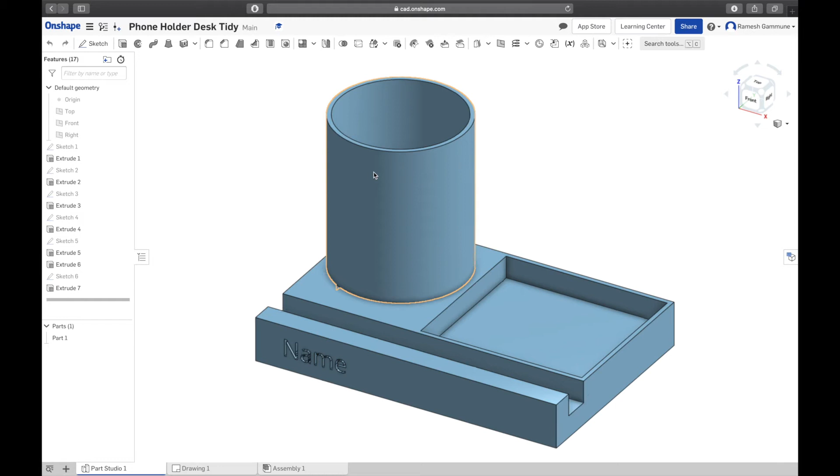I figured out that the best way for us to get to know the software is to actually make some little desk tidy. So your pencils and pens can go in there, your other bits and bobs can go in here, and down here is a little area for your phone to sit on, in landscape or portrait format, so you can watch videos while studying or whatever. It's small enough, and it's got your name here too.

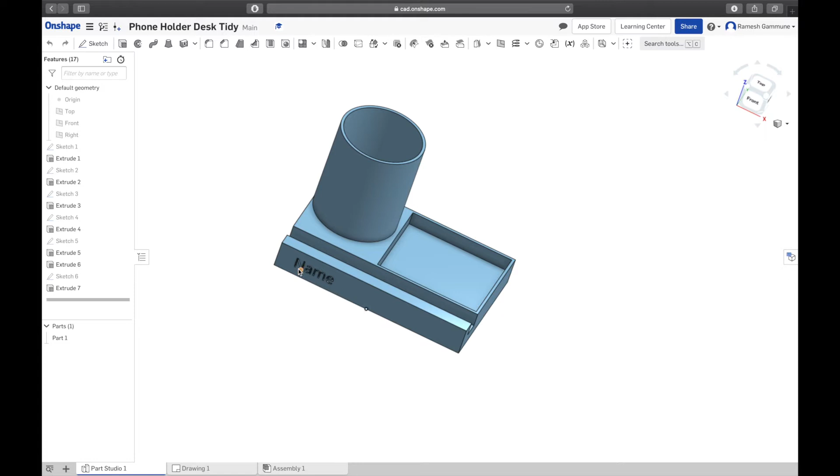It's small enough that we can 3D print these. We can 3D print up to 2 of these at a time on each printer, so I suggest you get this done. Work with me, get this done together, and once we get back into school, you can print this out.

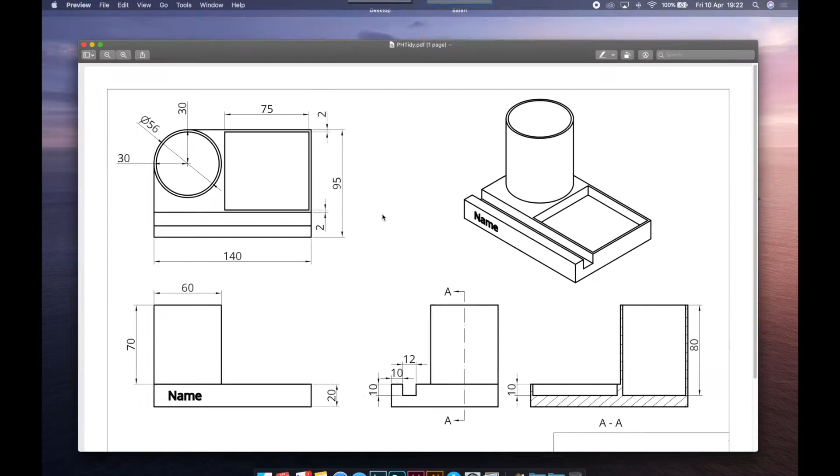Alright, so let's go ahead and start making it. I'm going to break this up into a few videos. Today's video, we're just going to focus on the base and this cut, and then we'll slowly advance from there. By the end, we'll also have a drawing that we can work off, so we're going to refer back and forth to this drawing when we work this model.

Okay, so we're back on our Onshape homepage. As you can see, you've got your Onshape tutorials folder here, so I'm going to click that. It's going to take me to my... well, yours should be empty. Mine's already got the tidy that I've done before. So I'm going to go ahead and create a new one.

I'm going to call that phone holder desk tidy. Now mine's a version 2, so _2, because I've already done one before. Right, go ahead, hit enter.

Let's talk about how to actually make something on Onshape. Onshape is a parametric 3D modeling software, which means we got to set parameters and then model it. It's not a free modeling software like, say, 3ds Max or Maya.

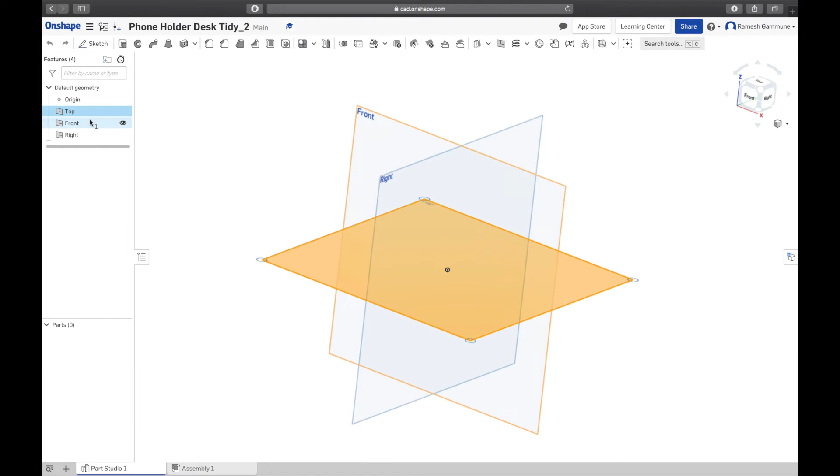Every 3D object starts off as a 2D sketch, and just like in real life, we have to start sketching on a flat surface. Currently we are in space. There are no flat surfaces in real life, but we are given 3 planes to sketch on: we got our top, front, and right planes, and we got our origin here. What you guys are used to is your X and your Y axis on your Cartesian plane. When you're working in 3D, you've got your Z axis, which operates 90 degrees to your X and Y axes. So we're working in 3 dimensions right now.

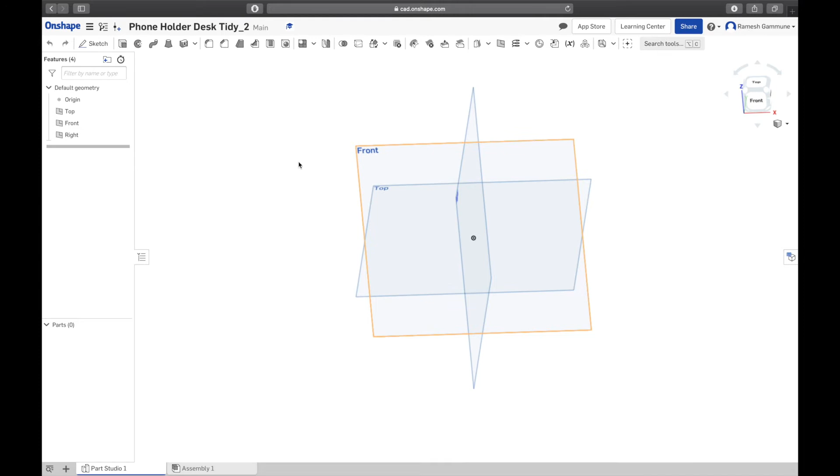It's going to be a little difficult for some of you to get your head around, but guys, once you do, it's going to be so easy.

Alright, so we're going to start off by making the base. Like I said, let's look at the base. It's essentially a rectangle with a bit cut off over here, that's 140 by 95. It's 140 mil wide, 95 mil deep, and 20 mil tall. Remember, 2D sketch first, so we're going to draw a box that's 140 by 95.

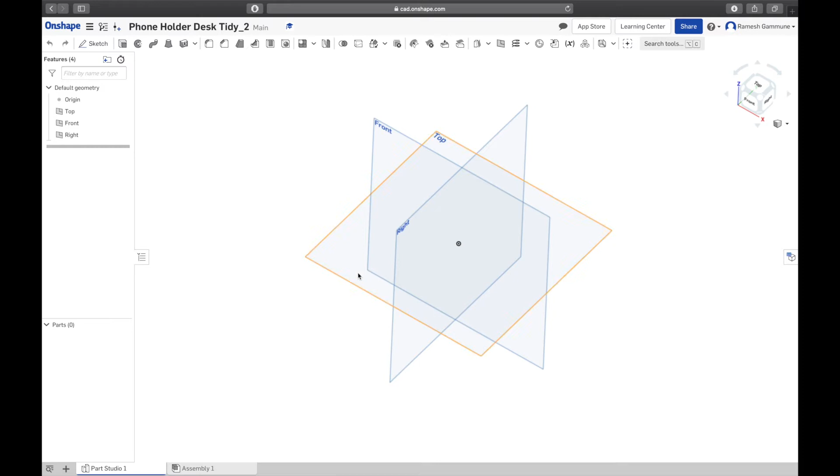Let's get that started. So I'm going to start drawing on the top plane and work up from that top plane. I'm going to hide the front, and I'm going to hide the right plane, and only have the top plane there. Now, how do we sketch something?

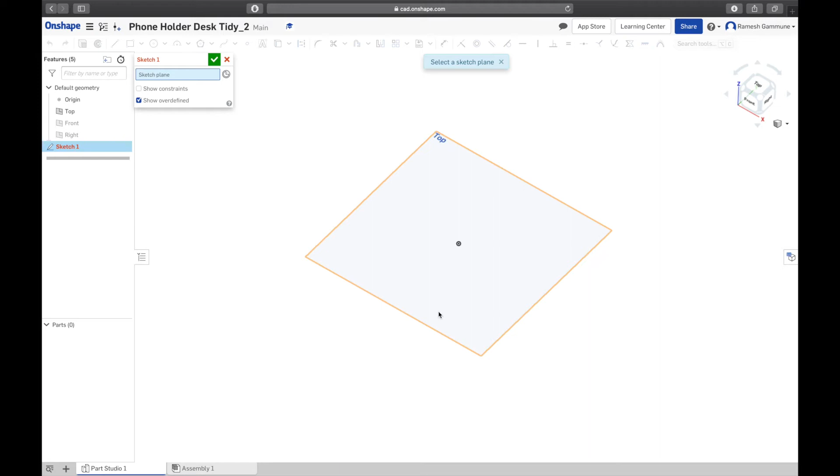See the sketch button over here, go ahead and click that. Now when you click it, you'll notice that everything else kind of gets washed out. You can't select them, and it says select a sketch plane, which means we need to select a plane to draw on. We are going to select this top plane first, so click that, click top plane, and you'll see it populates that dialog box, and all of these are now accessible again. Here we go.

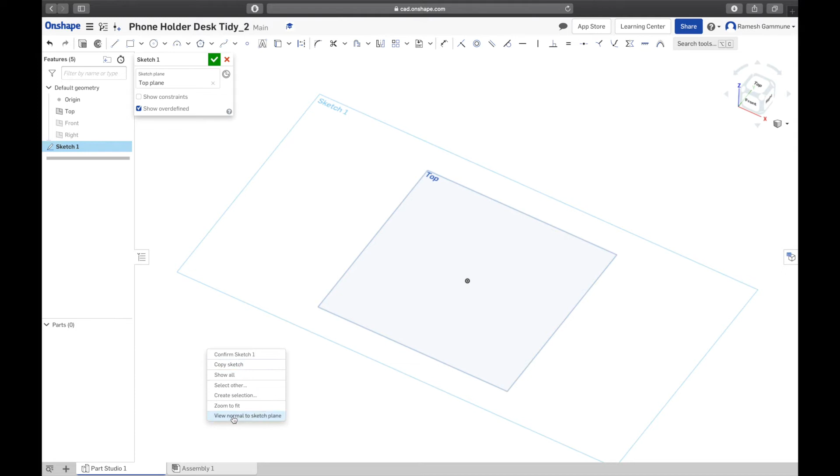Now I told you about good practice. This is my first big tip for you: right click on the space somewhere and go down to view normal to sketch plane, and there we go. Okay, we're looking directly down on the plane that we're sketching on.

So we need to start off with a rectangle. Today we are only going to look at this rectangle feature. Now by default it's on corner rectangle, we are going to go to center point rectangle.

You'd notice that if you hover your mouse over these buttons, it's gonna tell you what it really does. So this, it says center point rectangle R, create rectangle, blah blah blah. You can read it.

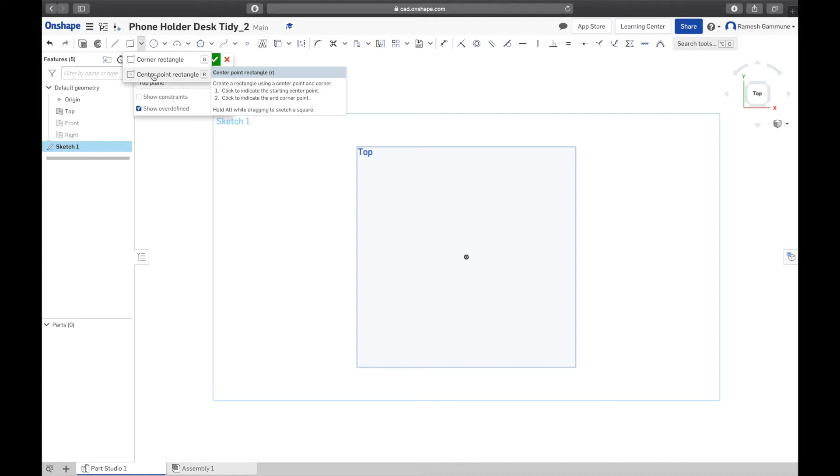We want the center point rectangle because we want to base our rectangle around this origin. That's why we didn't hide the origin. Second tip, good practice: you have to anchor your sketches around the origin, most of all the first sketch, because then your object is locked in space.

Get the cursor near that origin and you'll notice that it'll go yellow, and then when you're on it there'll be a little rectangle around it, which means now if you draw, that center is going to be locked on the origin. So click and release, then move the mouse and click again, and there's your rectangle.

Now if you accidentally click somewhere else, you're going to make more boxes. If you do that, don't freak out. Just go to this left arrow here on the top left, click, click, it undoes what you've done. That's because Onshape, once you let go of the function, is still locked onto this. To get out of it, all you have to do is hit escape, and then you're back to your normal mouse cursor.

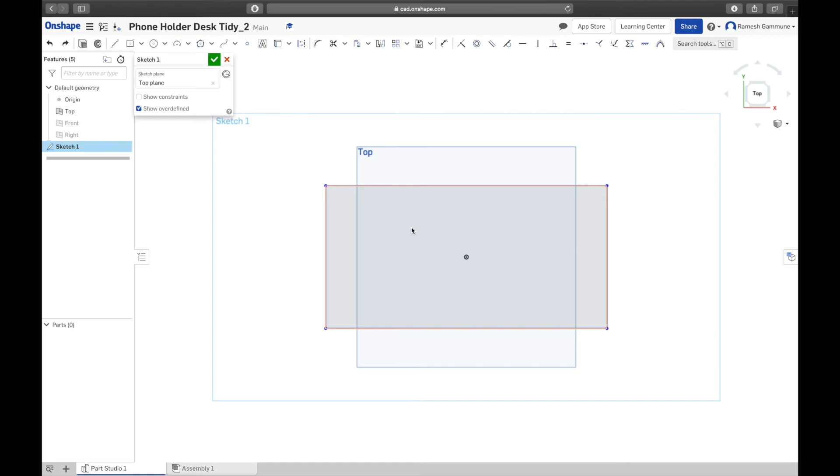So now we've got a rectangle, but it's not this rectangle. This rectangle is 140 by 95. Our rectangle is something random. So the next thing we need to do is define this rectangle.

We're going to do that by using this feature over here, the dimension feature. You can see two arrows with two lines across it. If you hover over it, it'll tell you what it does. Right, so click it.

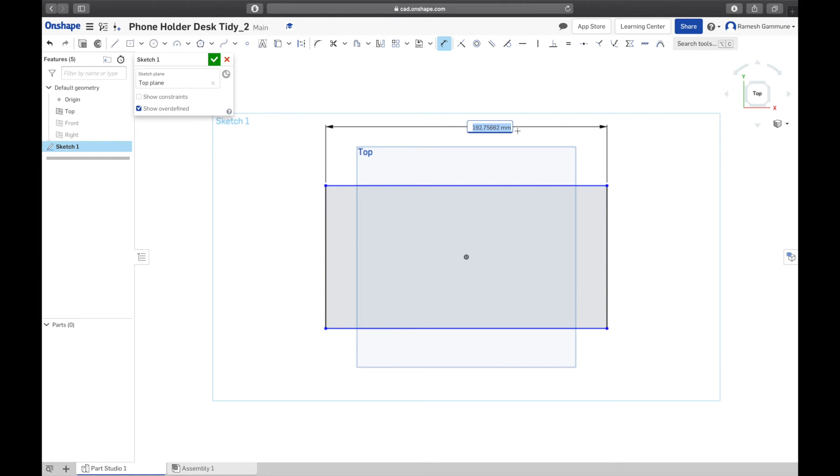Onshape has a sticky right click. You click and let go and it'll hold it down for you, so don't try to click and drag. We're going to dimension the long side first. Click, drag it up, and it'll convert it to a text box, and we want it to be 140 mil. 140, enter. Because we haven't clicked escape yet, we are still in the dimension tool.

If you've accidentally gone out of it, just click the dimension tool again. So the short one, we want that to be 95. 95, enter. There we go.

Now you notice that our lines are no longer blue, they're black, which means they are defined. These things cannot be moved. To prove it, hit escape and try and move those lines. They won't move anywhere. So that's why we've centered it around the origin, and we've defined the sizes.

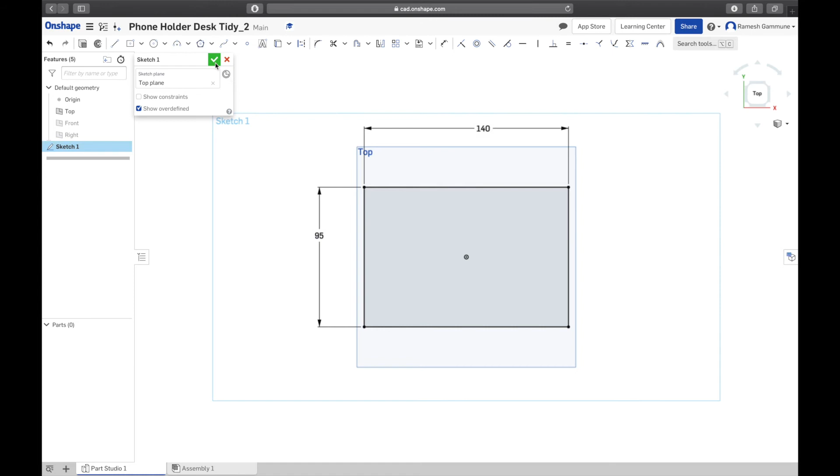Go ahead and click on the green arrow now, and your sketch 1 is done. You can rotate it, you can see that sketch 1 is on the top plane. Now the exciting part, we're going to make something in 3D, because you can do this in Microsoft Paint.

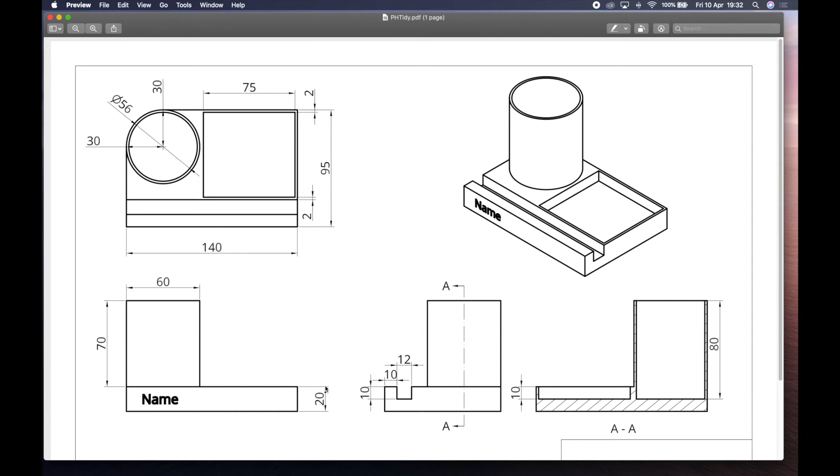Now we're going to 3Dify it. So we need to look back at our drawing and see this: it's 20 millimeters tall. So we got to do that now. Currently it is no millimeters tall because it's a 2D object.

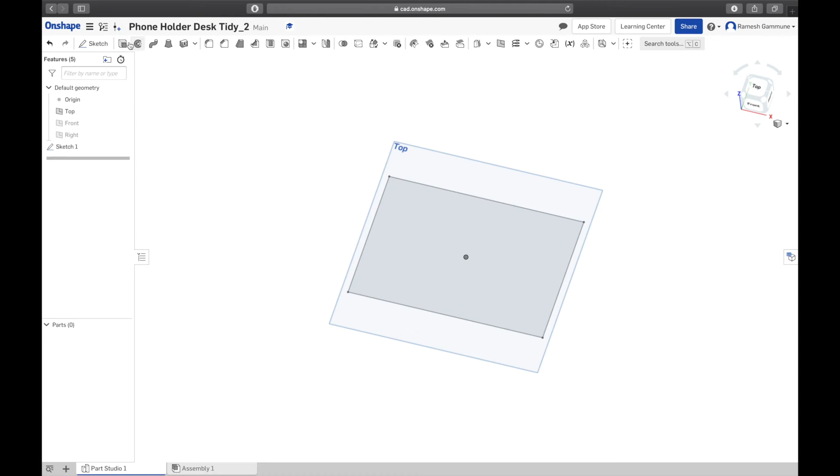So right next to the sketch on the top left here, you'll see extrude. All of these things, these are features, right? You can manipulate your 2D sketch to follow most of these things. But what we are interested in is extrude. So I'm going to go click extrude.

You'll notice this is extrude 1. Sketch 1, extrude 1. Next extrude is going to be called extrude 2. One after that, you guessed it, extrude 3. It's going to just continue like that. But you can also, if you want to, rename your thing.

So extrude 1, same, we've got our tick, cross, solid, surface, new, add, remove, intersect. We are interested in solids, and new, add, and remove. These 4 functions are what we are going to be focusing on for this project. You got blind, depth, I'll tell you that when we use them, which is in about 5 seconds.

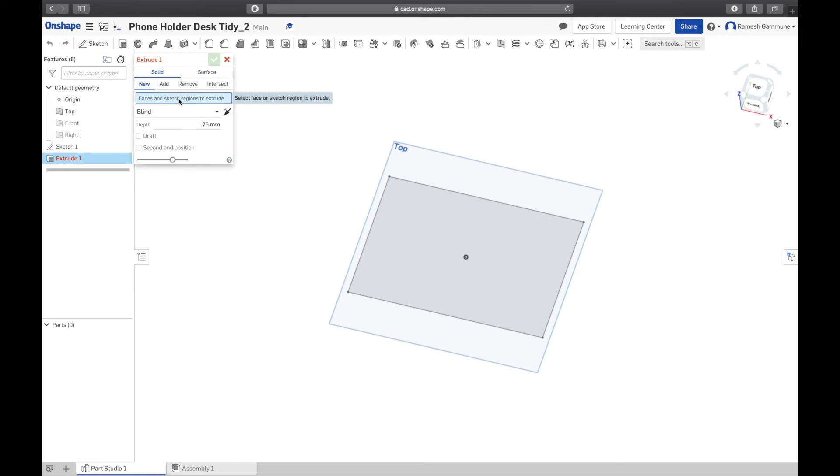So we got faces over here. We've drawn the sketch, faces and sketch regions to extrude. Click that, click the sketch, and there we go. It's gone ahead and extruded it. Extrude means pull, right? We're pulling that sketch and turning that 2D sketch into 3D.

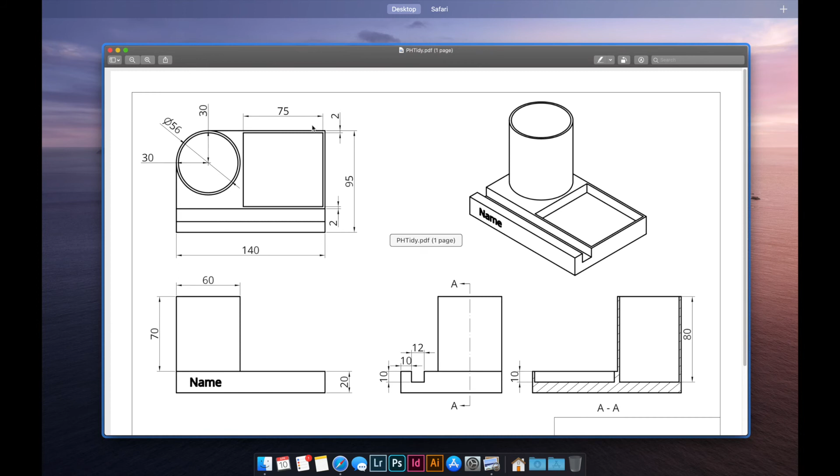But you can see it says blind, and the depth is 25. Now, what's our depth? Our depth is 20. We need to change that to 20.

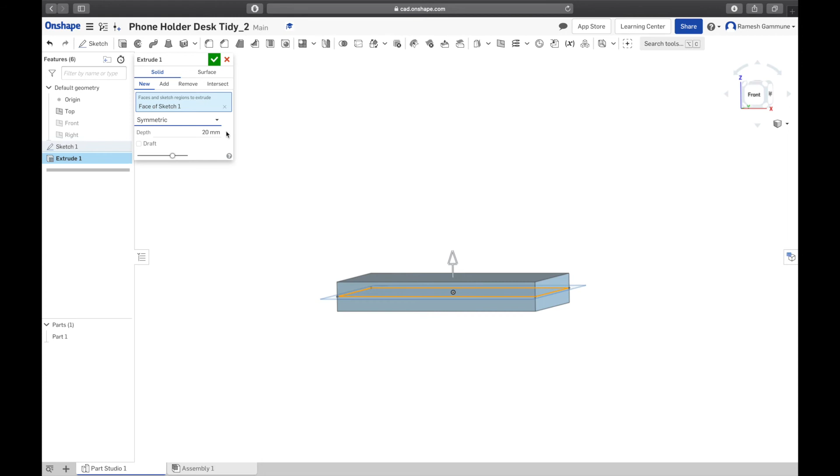Hit enter, and it's not going to leave the sketch. If you accidentally do leave it, double click it and it'll pop up again, don't freak out. We want to go to blind because we're going up in one direction. If you want to flip the direction, click this arrow, but we're working on top of the top plane, not below it. If you did symmetric, it would go both directions, but we can't use the rest yet since we have nothing to follow.

So blind, 20 mil going up from the top plane, and click. Done, that's our base. Next thing we need to do is make this cut.

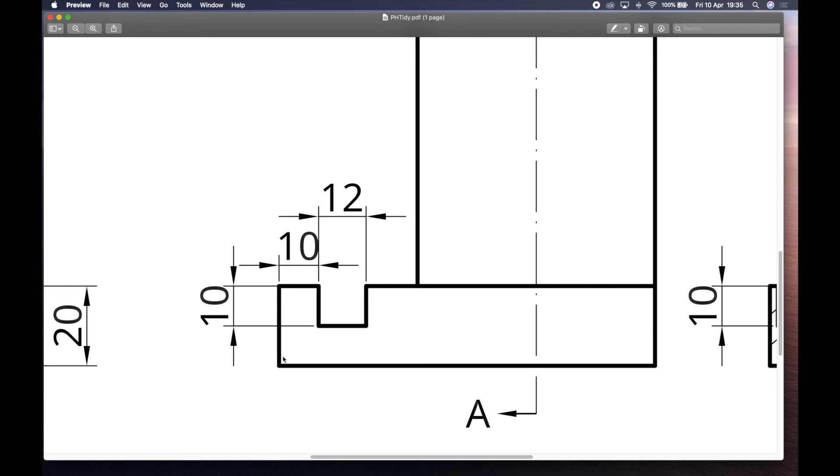This cut has a depth of 10 millimeters, a width of 12, and it's 10 mil behind the front face. Let's draw that on this side and cut it. What do we start off with usually? A sketch. Now for the sketch plane, we can't use a plane, because if we use the top plane, we can't cut in that direction. So remember, we can sketch on any flat surface.

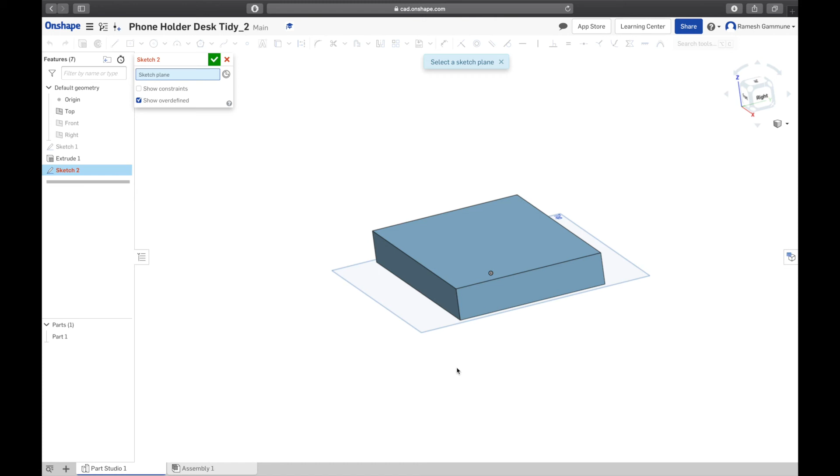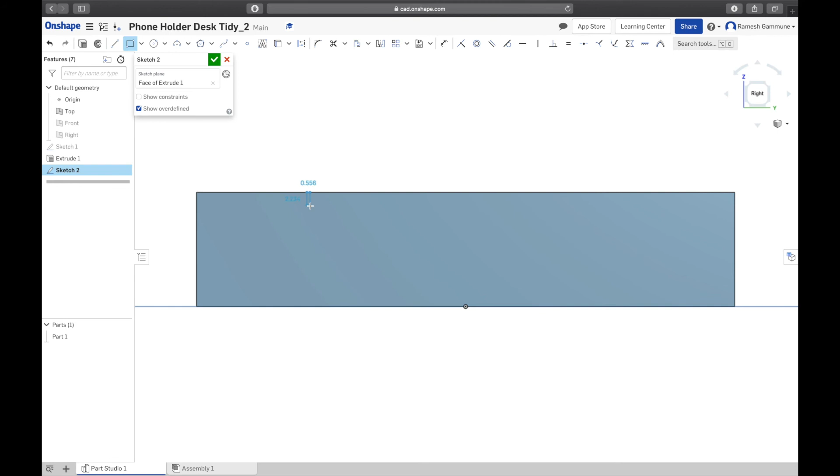We're going to select this side, the right side, and you'll see it says face of extrude 1. That sketch 2 plane has planted itself on that face. Good practice: right click, view normal to sketch, zoom in a bit, and we'll pick the corner rectangle this time, not the center point, and you'll see why. I want to base that corner rectangle along this edge—you can do it anywhere along the edge because we'll define it with dimensions after drawing it. Click, release, and click.

I've gone ahead and drawn a random rectangle. Hit escape, dimension. Let's go with the depth first—click, release, out, 10, enter. Width—click, release, down, 12, enter.

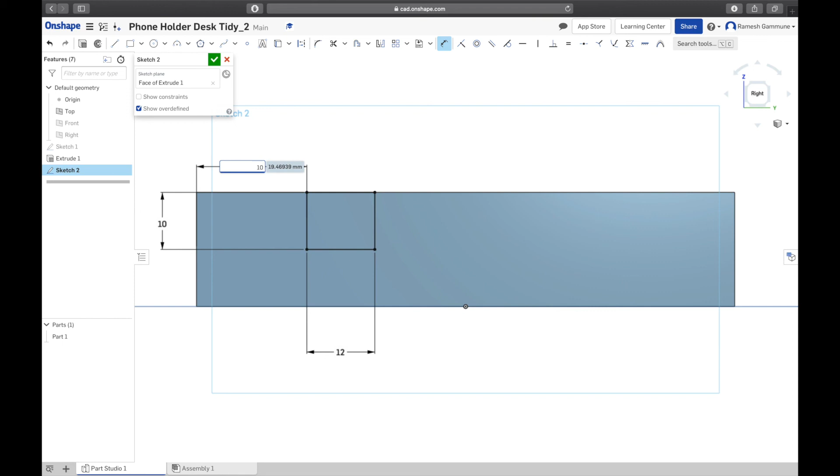Now this is tricky because we can't select this edge, but we can select this edge. I'll click and ignore that 10, and go till it highlights this edge. Not 12, it's 10 in it. Enter. Now hit escape to get rid of the dimension tool. You can see that it's fully defined because it's got black lines around it, not blue anymore.

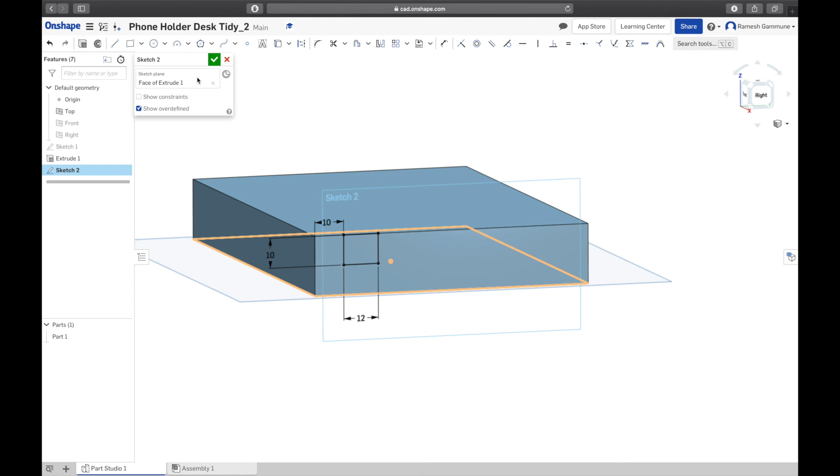Once you're happy with that, just cross check: face, right side, good, we're in the correct thing. Tick—you can always go back to that sketch by double clicking it. And now we're going to cut it.

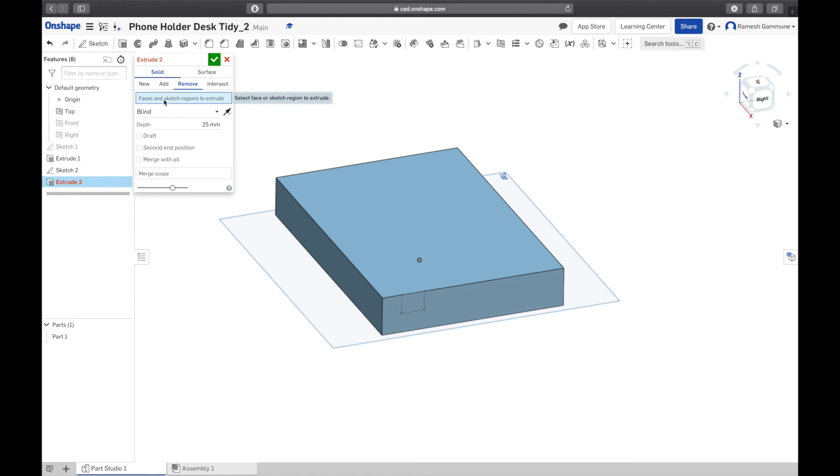Same feature, we're going to use the extrude function. Solid: new, add or remove—remember we're cutting, so we're going to remove. Click remove. For faces and sketch regions to extrude, you have to click this, the new sketch. If you've accidentally clicked both, delete those selections and click the correct one.

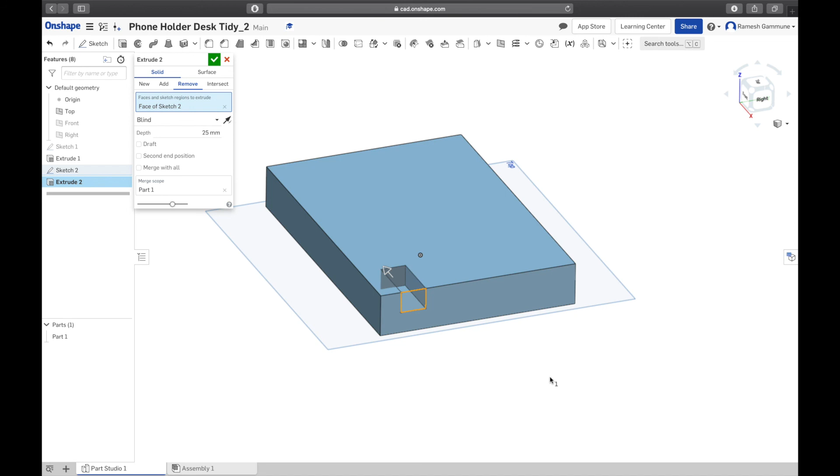You can see it's done a cut at 25 mil deep—that's the program's default depth of extrusion. Here's a fun thing to do: you can grab this arrow and pull it all the way across. Done, one way to do it. Bring it back down.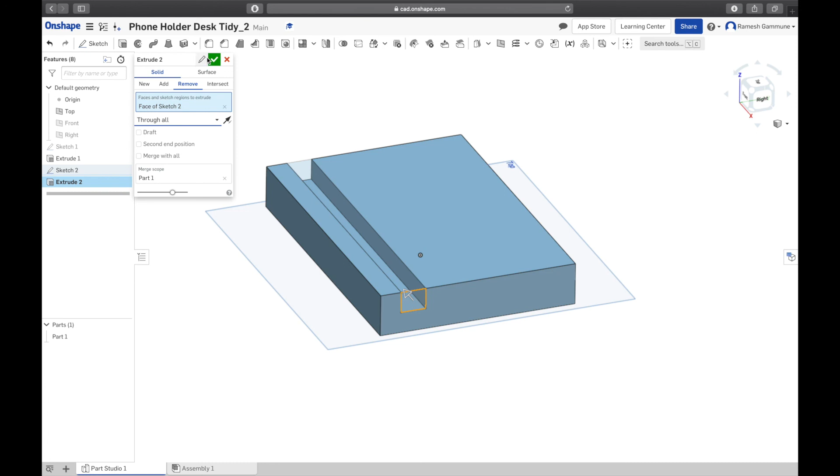Next way to define the width: you can type in 140 and hit enter, because that's our width. That's another way to do it. But the easiest way, guys, is to go down on the drop down menu on blind and select through all, and it'll cut all of it. Then click the green arrow.

Well done, you made a base for a desk tidy. Well, actually what you've made is just a phone stand, which is pretty impressive. Good job, guys. I think we'll leave this for today, and we'll come back next video and do the rest of it.

So, next lesson we're going to make this cutout.